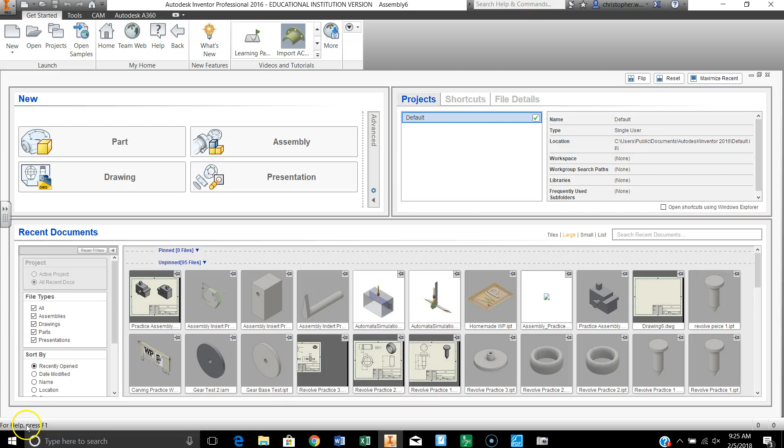So we're going to do a quick run through of how to do the revolve, the third practice in the revolve. Let's open up a new part. What we're going to make is

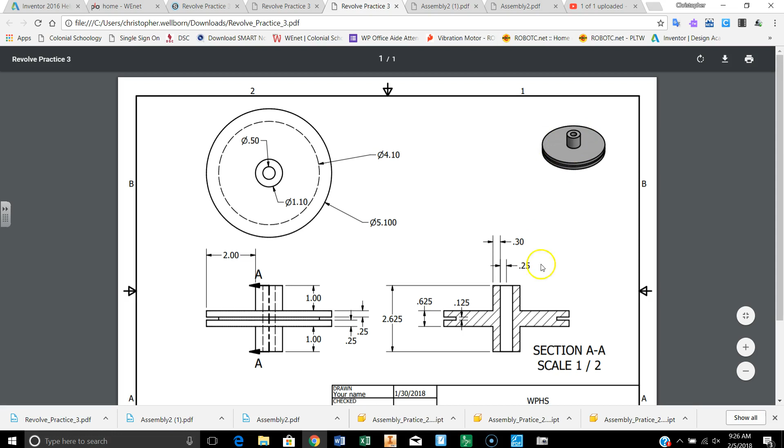based on the drawing that's in front of you, specifically this part of the drawing. It's going to look like, let's see if I can find it for you real quick here. It's going to look like this, but what we're focused on is this part right here, because we're going to make our revolving axis right through the middle of this part, like that.

And what we need to construct is this shape right here. We're going to use our line function to create it, and then dimension it.

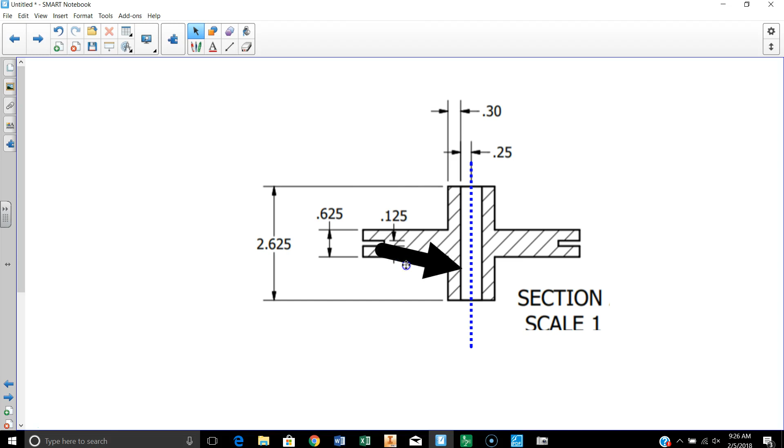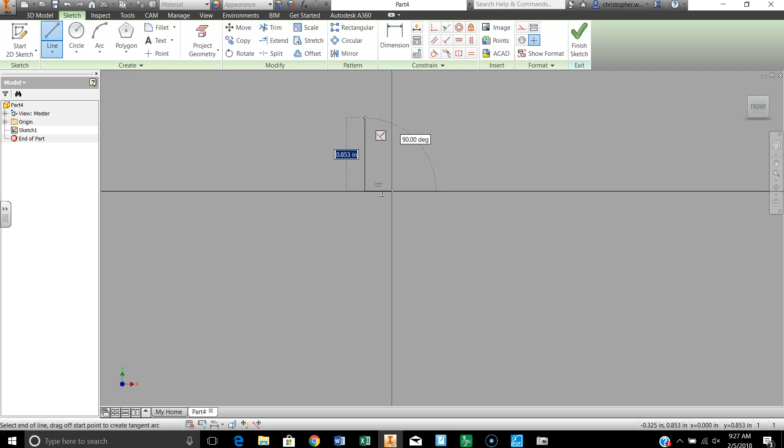So, using those dimensions, we'll start a 2D sketch, XY plane, and line function. I'm going to start here, go over about 0.3, but it doesn't have to be exact, and then go straight up about 1 inch. But once again, it doesn't have to be exact, but your angle should be 90 degrees, should be straight up. And then over about 2 inches, making sure that I'm 90 degrees exactly.

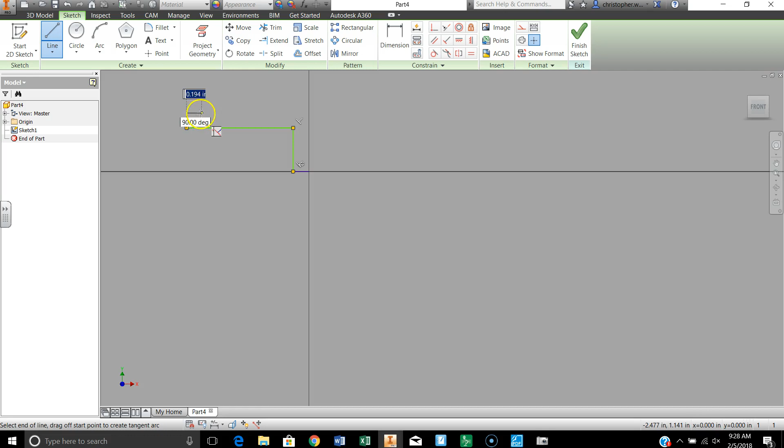And then we're just going to go up a little ways in the neighborhood of 0.25. Once again, make sure you're straight up. And then over about a half inch. And then up about 1/8 straight up.

Over until, now this is important. Go over, make sure you line up with, see how that dotted line shows up? That's what we want. We want to line up with that. Click there. Straight up a little ways.

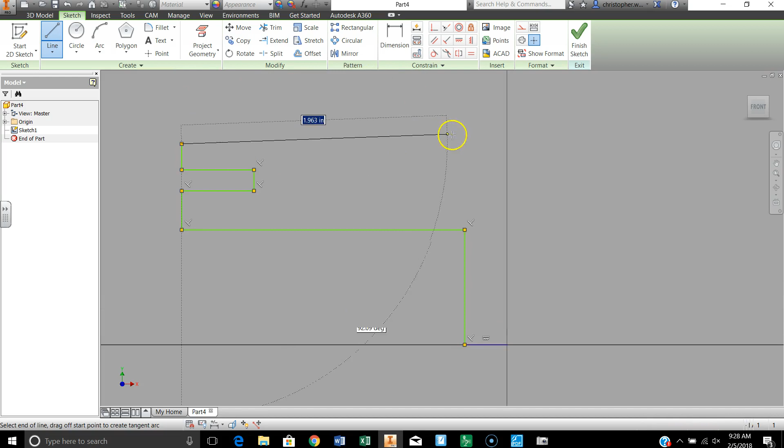All the way over. Until, once again, see how that dotted line shows up? I want to make sure I'm lined up with that. Click there. Go up about 1 inch.

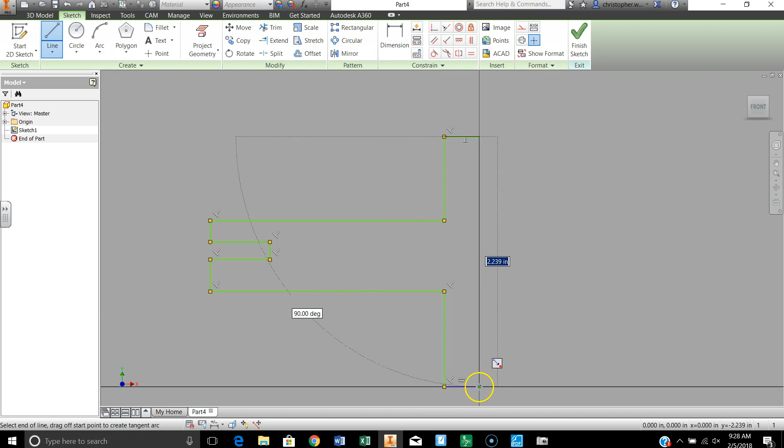Click. Come over to the y-axis again. Click there. And then drop all the way down to where we started. All right, and there is our rough shape.

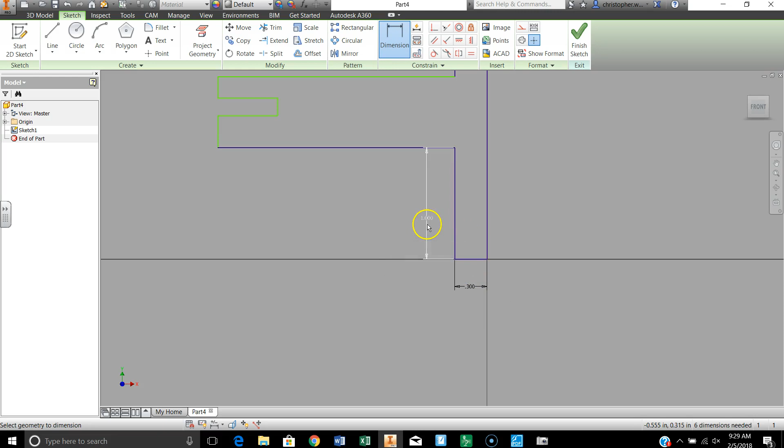Now we're going to dimension it. I'll go around starting here. I'll do it in the same order I made them. So this one's going to be, click on the number, 0.3. This is going to be 1 inch. This is going to be 2 inches.

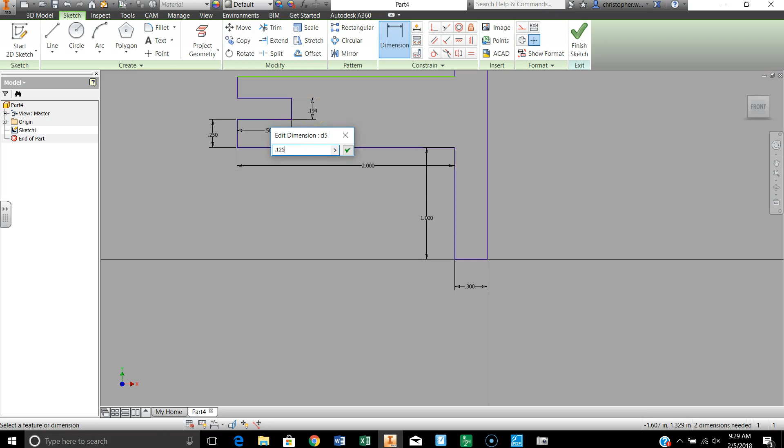This is going to be 0.25. This is going to be 0.5. This is going to be 0.125, 1/8 of an inch. This is going to be 0.25. And by the time we get almost there, let's do this is going to be 1 inch. And that should do it. There we go. Now everything's constrained.

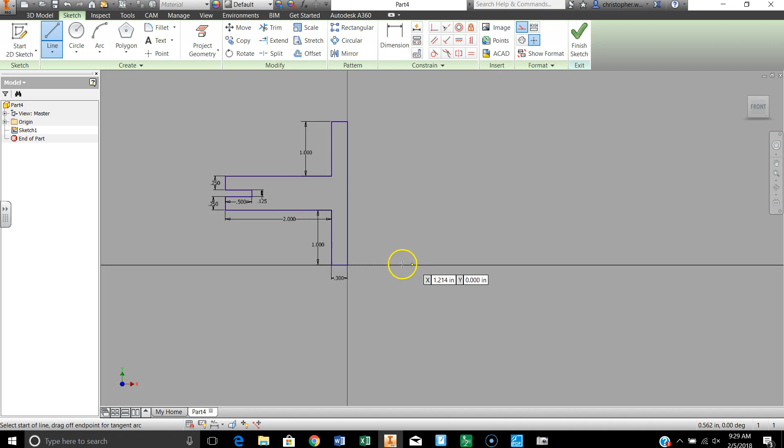Now we have to put in our axis. So we're going to make a line. I'm going to make it a construction line. It doesn't really matter which one it is, but I like construction. So we're just going to go over here to the x-axis, click once, go straight up. Doesn't matter how far, but make sure you are straight up. Look at that, 90 degrees, or straight up.

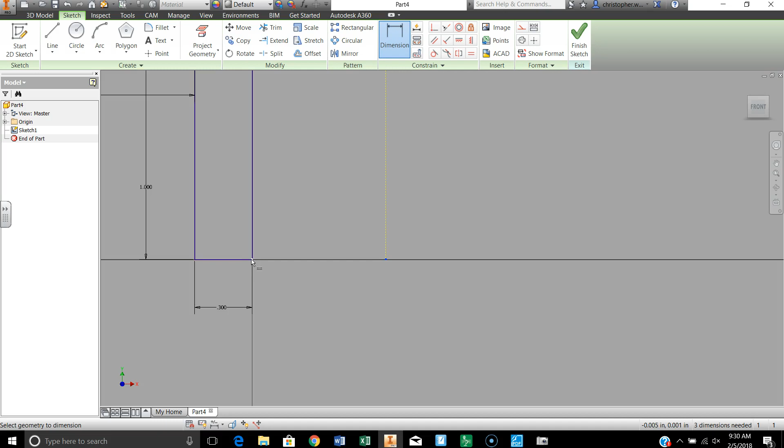So click again. And then we're going to dimension that. What we're going to dimension is the distance from the bottom of that line, this point, to this point here. And we want that to be 0.25. All this can be figured out from looking at your drawing. But I'm giving it to you here for free.

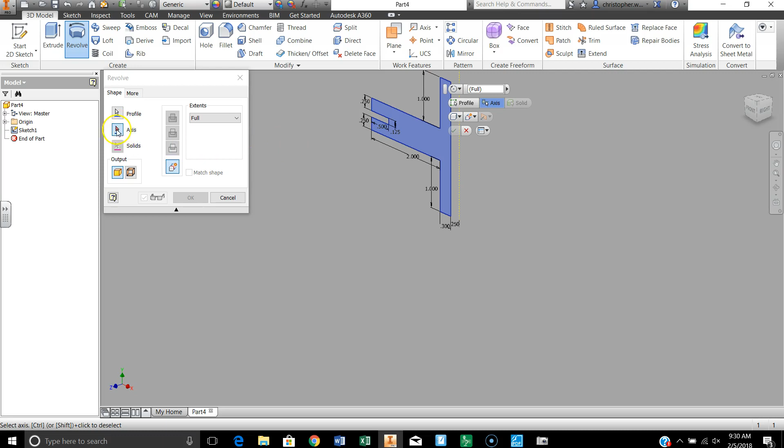All right, once you've done that, finish your sketch. Right-click, hit Revolve. It already selects that shape. So now we have to tell it the axis, which is that line we just made. Revolves it around. And we're done.

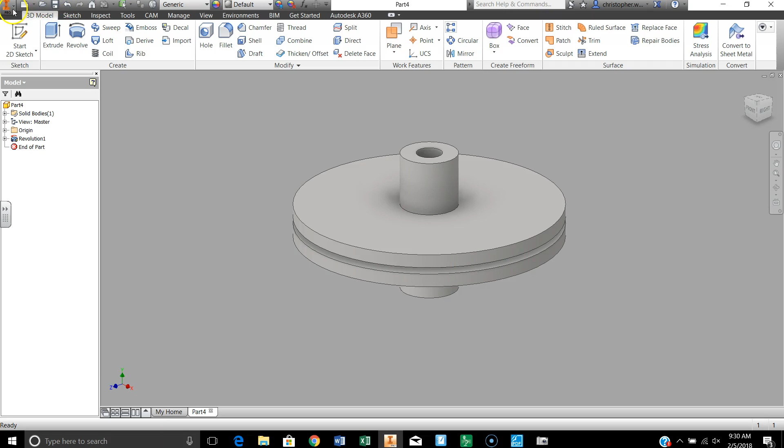Now, at this point, what I'd like you to do is submit a drawing for it. I'm going to show you how to do the drawing as well. So we're going to save this file. And I'm going to call it Revolve Practice 3. I'm going to call it B, because I've done it more than once.

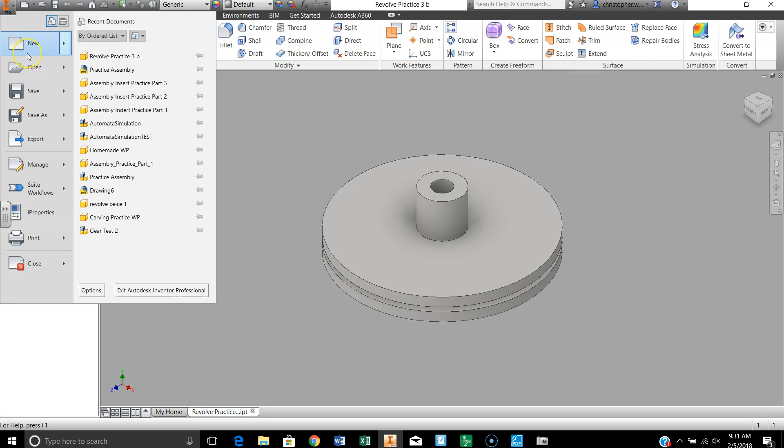Save. And then I'm going to go to New, Drawing. Remember the routine we have to go through here. We're going to delete the big box. We're going to edit the sheet. Make it a size A. Oops, size A. There we go. Put in a new box. Put in our name and all that other information by going to iProperties and Summary.

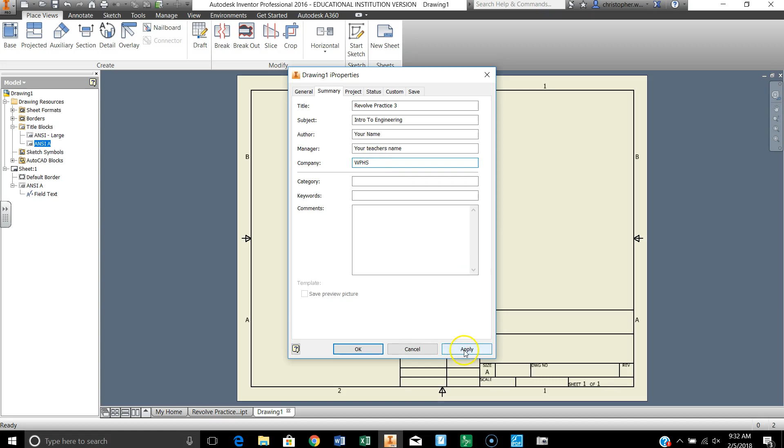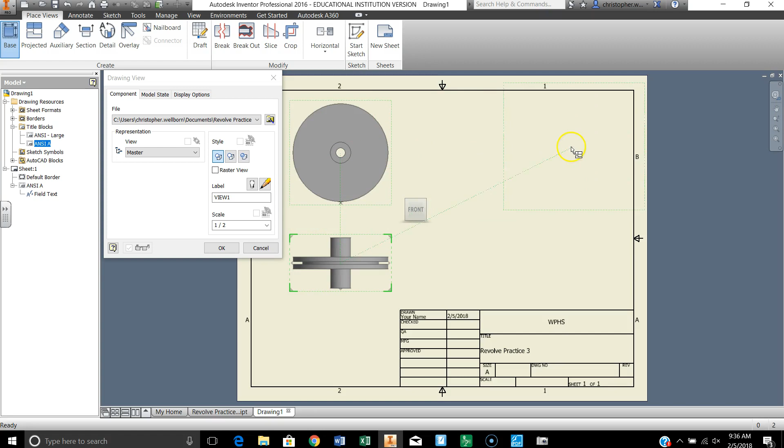All right, we're going to place our views. So we hit base. Now let's see, I want that one's fine there. And I'm going to put a top view of it here, and over here I'm going to put the isometric. Don't put anything here yet. Hit OK, double click that one. There we go, make it gray.

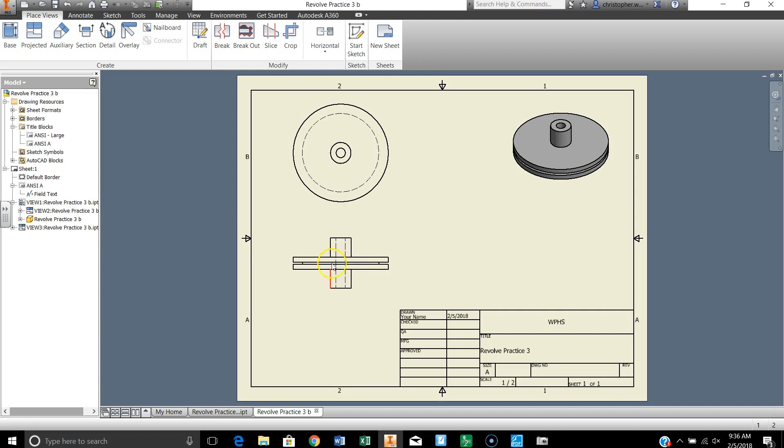Now I'm going to show you how to do a section view. This is where you imaginarily, if that's a word, cut something in half so you can see the dimensions in the middle. So I hit section, and I'm going to cut.

I click anywhere in here where you see that red box showed up. Click anywhere there, and now I'm going to go to the center of this thing right here. I'll click once, come down, I'm going to get to this point here in the center of it. Click again. I'm going to move either left or right, it really doesn't make a difference in this case. And I'm going to right-click. Don't click any, right-click and hit Continue.

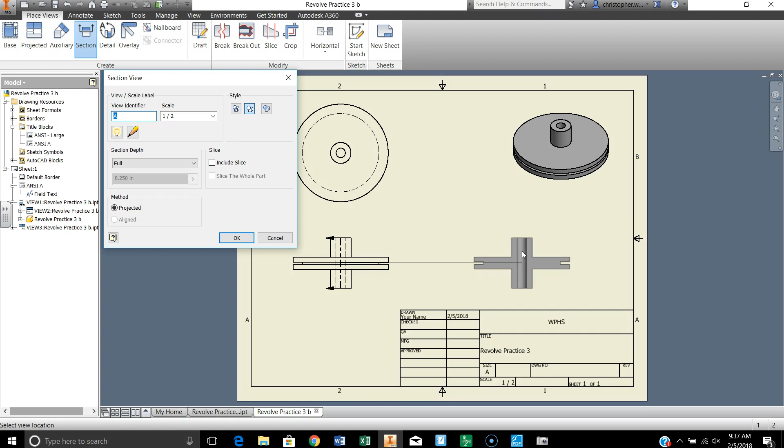And it creates, notice it cut this thing in half. You're seeing right here what you would see if you cut it in half. To show the parts that were actually cut, that's what the diagonal lines that you see are. And these are the things that you're going to dimension.

So let's go through and dimension as many of them as we can. I may not do it exactly like what you see in the diagram you have in your notebook or whatever, but that's okay. So remember, you go to Annotate, Dimension, as long as the information's there. I'll go from here to here, and that'll do the entire height.

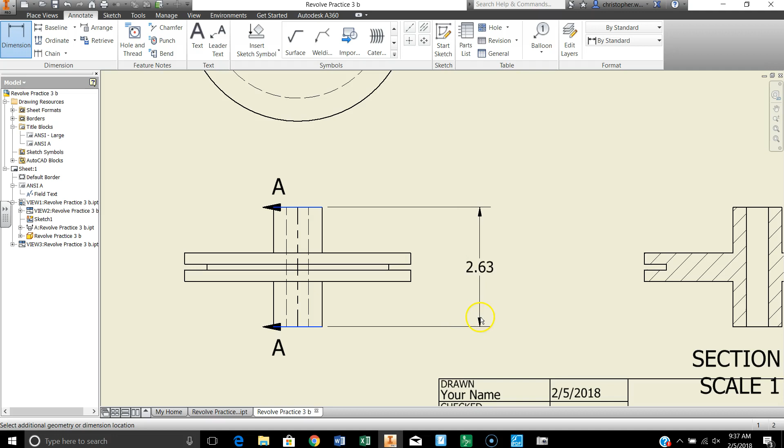And let's take this one out to 3 decimal places. Okay.

All right, we'll dimension this one next. I'm going to go from this point to this point. I'm going to zoom in here. We're going to do this little piece, and this little piece here, and this little guy here we'll do on the inside.

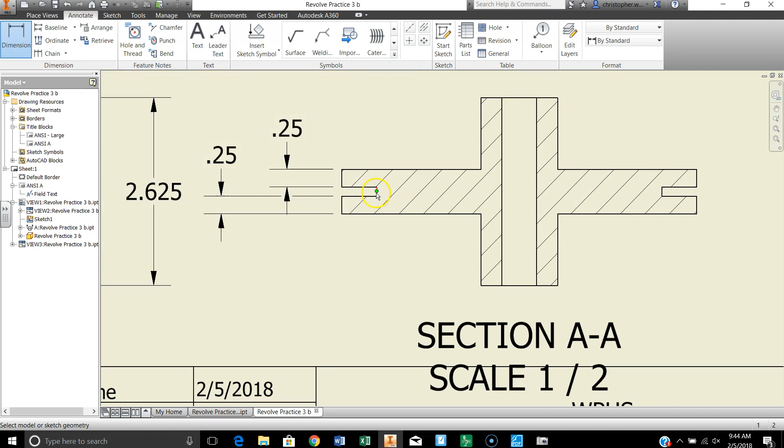So get that, now try to avoid those green circles. There you go. And with this one, change the decimal places to 3 so we can see just how big it is.

Let's do this, let's show people how far away we need that axis to be. So we're going to dimension from here to the center of that piece, and that shows people that.

And then we're going to dimension this piece to show them that it's 0.3. And I'm going to, on the drawing you have, I forgot to do this, but I'm going to dimension that distance is 0.5. And I think that's the, oh, this distance is 1 inch. And just for the heck of it, we'll do this distance is 1 inch as well.

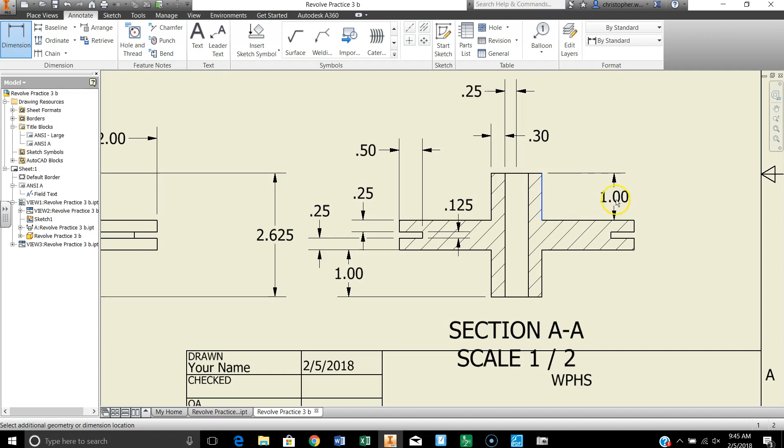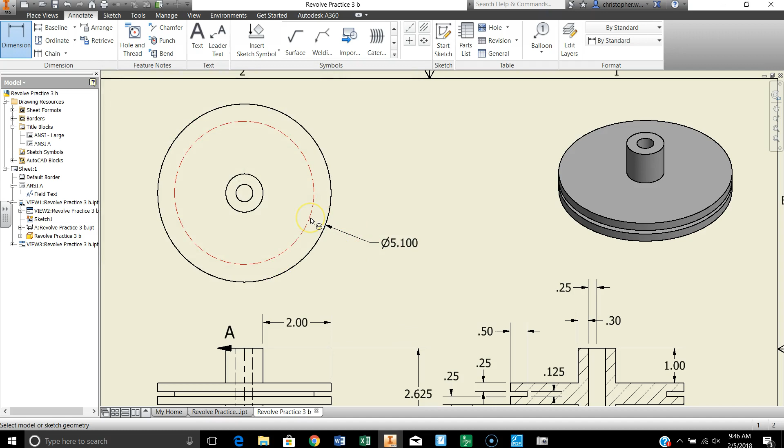And these radius, this is a radii I should say. So this one, or actually that's a diameter, that's all right. Just in case it's 3 places, but I think we're all right. Yeah, we'll do this one, and this one, and this one. And that should do it.

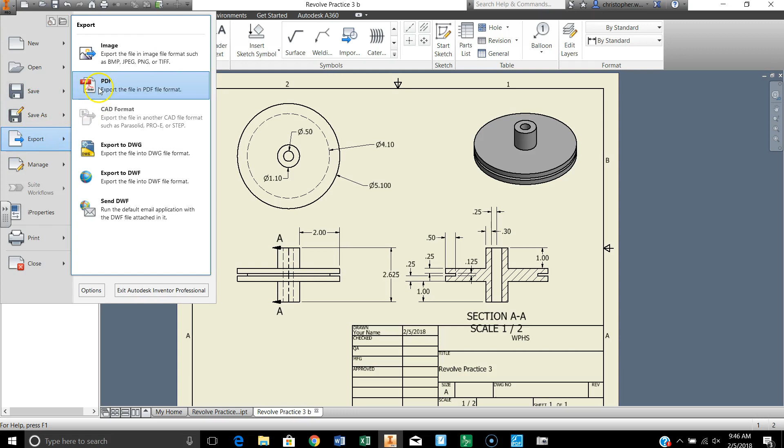All right, and then we're going to export it. This is a new way of doing this. I was doing the print thing, but I realized you can export it as a PDF, keep the same name, put it in your documents, and then upload it to Schoology.